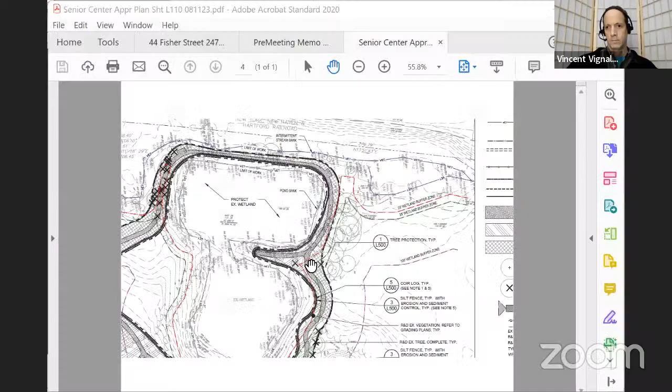That's a plan. So here we are with the approved plan. It showed this distance here to the edge of the wetlands there. So it looked like it came to the end of the pavement—this is the approved paved walkway. And so the new pad is here.

Does that seem right, Scott? Yeah, roughly—within a couple feet here or there, that's where it is. I'm not splitting hairs, but yeah, that's where it is. Okay, good, you can take that down, Vinny, from my perspective. Commission's questions, comments, concerns here.

How thick is that pad? 4 inches, with 6 inches of gravel base underneath. It's a typical bench or picnic table pad.

I guess speaking for myself, I feel like the whole trail is for ADA accessibility. There was a picnic table and a bench out there, and to make things ADA accessible, you need that pad around it, a spot for a wheelchair to get in there.

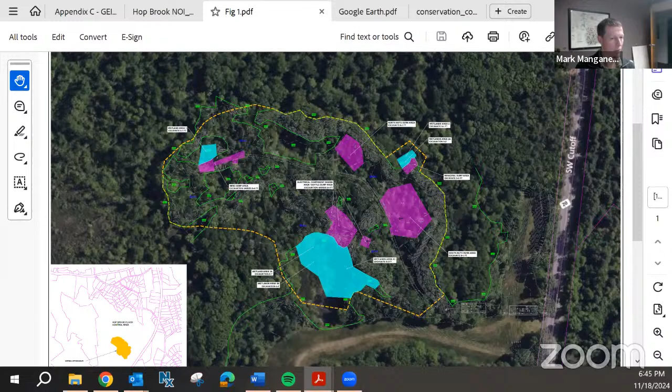If I zoom in a little, we have the wire dump area, which has been called Wetland Area 1. Throughout the plans, the depth of excavation is listed for each area - this is wetland area which will be excavated, and this is buffer zone area that will be excavated.

Sliding down, this is the largest wetland area, referenced as Wetland Area 3. It's mostly 1 foot of soil that will be removed. There are a couple of pockets where slightly more will be removed, closer to 3 feet. They're quite small. Then we have buffer zone areas and upland areas shown in pink.

Similarly, each one is labeled with the depth of excavation. This is another small wetlands excavation area here. I'm going to shift over to the site plans now.

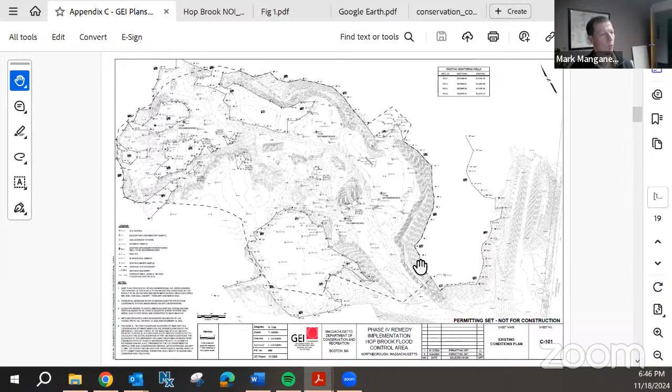Again, this is a very similar view, very similar scale. This is existing conditions - you can see the wetlands around the perimeter. Wetland flagging is here, and small isolated wetlands are here.

This is a site prep and erosion control plan, which really illustrates what's going to happen out there in terms of construction activity. This is a proposed haul road from Southwest Cutoff. There's a contractor laydown area specified here, and the haul road extends in and provides access for construction equipment to each of the remediation areas.

So you can kind of envision how this will occur in terms of the footprint of disturbance and movement of material during the process.

The largest area is this Area 3 that I mentioned - this is 28,000 square feet of wetland, probably the most challenging area in the project footprint. This wetland is probably bone dry right now, but at times during the spring it does have water near the surface or even at the surface. So managing water during the construction process is going to be a key feature of the project.

We have provided a general project spec, which is that we're going to try to do this work during the dry part of the year in the summer. Would have been great if we had started like August 1st of this year - we're hoping for similar conditions to that. But either way, the construction schedule is going to be set up such that the excavation in wetlands is scheduled for the summer months and will essentially adjust as weather conditions allow.

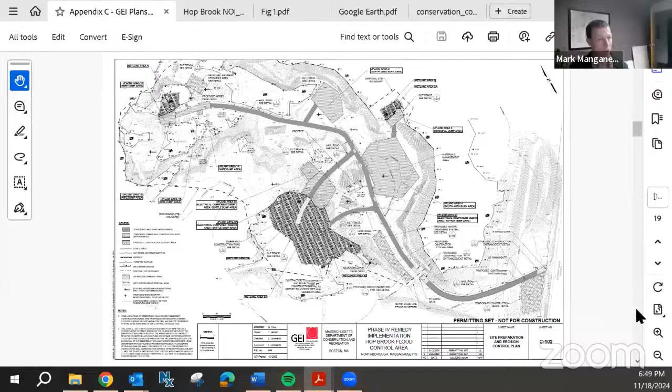And then we have detailed planting plans for each area, which I'll skip down to here. So these are zoomed in. This is that first wetland area we looked at, as well as the buffer zone area. There's a plant list, all native plants of course, and seed mixes are specified. This is the case for each disturbance area, including the upland buffer zone area. So it's not only for the wetland areas, all the upland areas have a detailed planting plan for restoration.

This is the larger wetland area. It's partially a marshy habitat presently, so the plantings are concentrated in the shallower nearshore areas, with seed mix and aquatic vegetation proposed for the deeper areas.

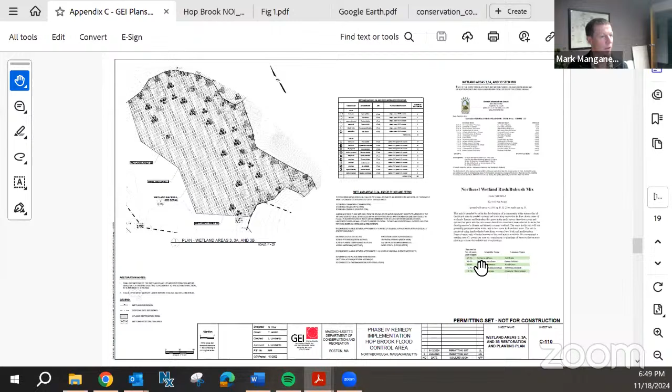And these are some upland areas. There's restoration proposed for all the temporarily disturbed areas, including the haul road, all the laydown areas, the material management area - any area within your jurisdiction that's going to be disturbed is proposed to be restored with native plantings and seed mixes.

Construction will be monitored by a wetland scientist throughout the construction process and then post-construction, to make sure all the plantings reach compliance milestones. 75% coverage within 2 growing seasons is typically the standard. You're probably familiar with wetland scientist monitoring reports being submitted to the commission on an annual or semi-annual basis. We completely anticipate doing that for at least 2 growing seasons, and possibly more as a result of our Corps permitting.

Which leads me to other permitting this project's already gone through. This has gone through the complete MEPA ENF EIR process. We do need to obtain authorization under the Massachusetts General Permit from the Army Corps of Engineers. We're planning to file that application very soon, as well as a water quality certification application from Mass DEP. We are seeking a land disturbance permit here as well - that was part of the application, which Vinny was very helpful in guiding us through. So that was included in this notice of intent.

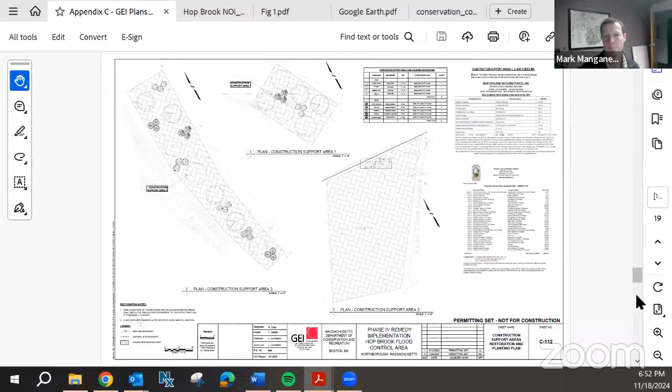And lastly, I'll mention that we did get some comments from Vinny, and we sent him some responses to those this afternoon. Not sure if he's had a chance to review those, but if there's any discussion we need to have regarding our responses to comments, we're certainly willing to have that with you tonight. So that's an overview of the project, and we'll be happy to answer any of your questions.

Thanks, Mark. I've got 3 quick questions here. Are there still debris out there that needs to be pulled out, or has it all been done? There is a little on the surface and things that trees have grown through that are really not retrievable yet.

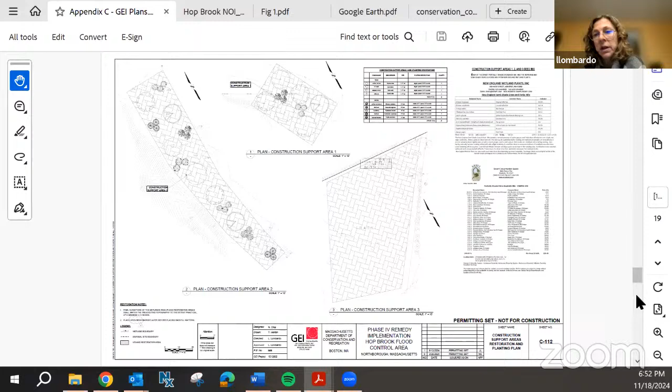From start to finish, what's the length of the project, do you think? Leslie, 2 seasons, or where are we at? Yeah, I think the hope is that we can get it done over 2 seasons, so starting in the summer and finishing late fall.

There's a road going in there, and there's also an area you laid out for construction materials and vehicles. When you're done, what happens to those? Those are all restored also. Okay, good. Any commissioners have questions or comments?

I was just curious, it's hard to tell from this aerial photo - how would you characterize most of these wetlands? Are they forested or shrub swamp? It's variable. The wetland around the perimeter is a forested swamp. This one over here is similar habitat - I think there's a lot of sweet pepper bush over there, so kind of a terrestrial wetland.

This wetland over here actually has water in it seasonally. In fact, this has been identified as a potential vernal pool, so that's a different habitat. But again, we're going to try to restore to existing conditions there so it can hold water as it does presently. And then this larger one is more of a marshy habitat, with shrub swamp around the perimeter as you approach the upland.

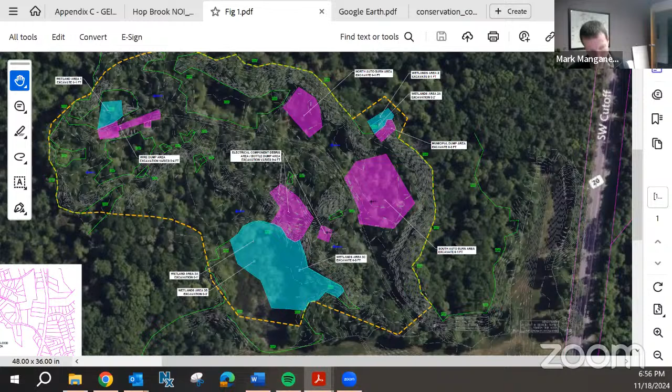We don't really expect any. To be honest, we went through, like I said, the full MEPA review. Now, of course, the Corps wasn't involved in that, but multiple agencies have viewed this. It's kind of been through the ringer. It's not impossible that there would be a change, and if there was a change that warranted coming back to you, we could come back to you with an amendment request. Okay, good.

Rick Leif, you're on. Thanks. So I'm just interested, being an abutter to the property here. I know that none of the residences are extremely close to what's going on here, but we live on Wiles Farm Road, which is a cul-de-sac that comes in from Davis Street, kind of northwest of this area. Our backyard sort of butts right up against the conservation area there. We've been there for 40 years, so I guess I'd have two questions. One, is there anything we should have been concerned about having abutted this site for 40 years, as to what impact it might have had on our well or anything else on our property? Or secondarily, once this work starts, is there anything we have to be watchful for or careful about regarding any disturbances that may have some impact, especially on the well on our property?

For the questions regarding the well and groundwater, I would defer to Leslie. If you could comment on that, please, Leslie. Yeah, I think the contamination on the site is pretty contained to the site. As far as construction activities, it would really be fugitive dust that would be of concern, but that wouldn't really be a concern in this type of area where it's so heavily wooded, and the contractor will be required to keep dust down. Because of the location of the property, it's pretty isolated and very well contained. There are no concerns. Does that answer your question?

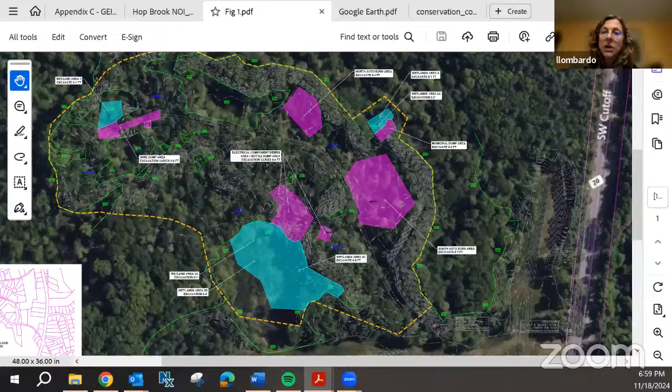I was just going to add that it was primarily auto parts that were buried out here. As Leslie noted, primarily we're dealing with lead, which stays put, and we're going to be monitoring the low levels of groundwater there. That was not a driving factor, I mean it is a controlling factor for the site, but there wasn't any sort of offsite impact to our understanding.

I just asked the commission, as this goes along, if there's any reason why any of us as abutters would have reason to be concerned or need additional information. I assume we'll continue to be kept in the loop about this, but it sounds like it's contained enough and we're far enough away from it, so it shouldn't be a problem for us.

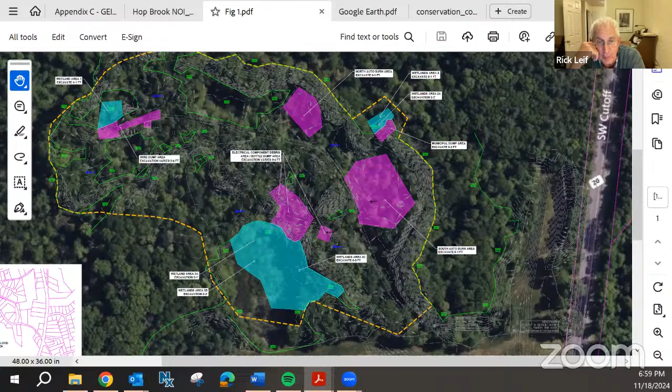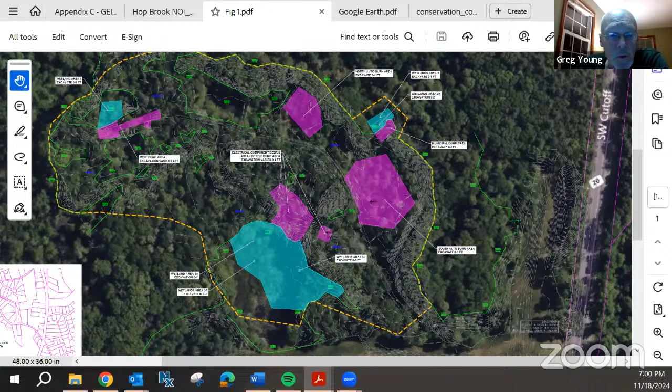Good, okay, thank you. You all set, Rick? Thank you. Mark, if you could take your picture down there, it'd be great. Thank you, sir, got it. Okay, so I think we're all set then. Move ahead here, Vinny, you agree?

I agree. We need a motion to close the hearing on Southwest Cutoff Land Disturbance NOI. So moved. Is there a second? Second, seconded by Dan. Roll call vote: Dan Clark, yes. Justin Dufresne, yes. Todd Helwig, yes. Kelly Marston, yes. And I vote yes. Hearing is now closed.

Now we need a motion to issue a notice of intent and a stormwater management permit for Southwest Cutoff as defined in the agenda. So moved. Is there a second on that? Second, seconded by Kelly. Roll call: Dan Clark, yes. Justin Dufresne, yes. Todd Helwig, yes. Kelly Marston, yes. And I vote yes.

Very good. Thank you, folks, thank you so much. Good presentation, thank you, all the questions were there. Thank you for all your help, Vinny. Appreciate it. You're welcome, thank you very much. Have a good night, take care.

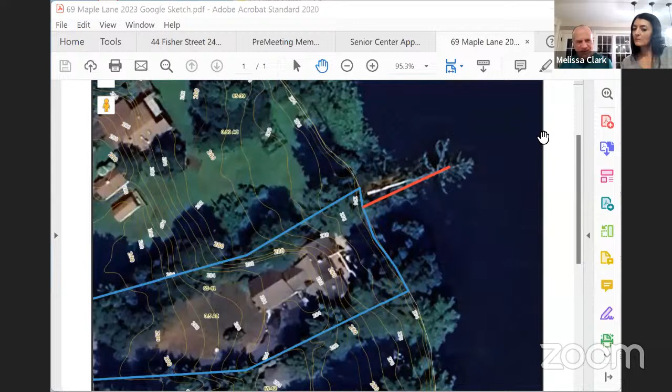Sure. Hey Vinny. Yep, sorry, I dropped off, I had an internet problem. My wife's downstairs, anyway, capacity issue. But did you bring up the point of town property? I have not spoken, I just pulled up the image of the property.

So what you can see in blue is the Clark's property here, and the pond is off to the east. This red line was an estimate of where the tree was, but when I pulled up the 2023 Google image, you can actually see the tree laying down into the pond where it's kind of split along the edge. It's probably about right, a 90 to 100 foot long pine, extending very far out into the pond.

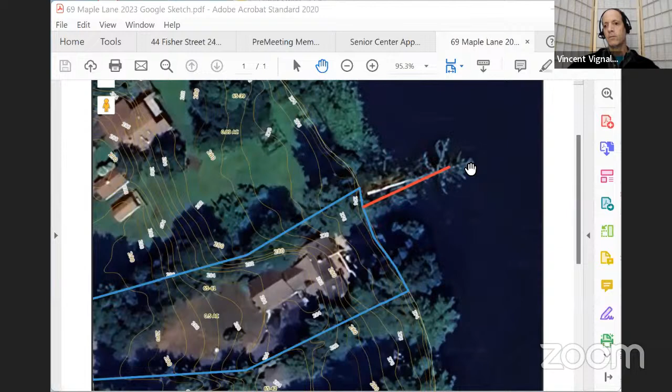This is all owned by the town. The town manages the pond, we've done treatments for the aquatic invasives, but it looks like the tree is owned by the town and on town property. As we've done in the past where people own property and worry about dangerous trees on town property, we allow them to take them off if it is truly a danger. So that's where we stand: whether the commission considers this a danger, or whether it's just part of nature where trees fall and that's what happens.

How would the tree get out of there? You mentioned maybe a crane. Can they access through your property?

So again, we've had several tree companies come out and consult with us, and we asked what would be the most effective way to be least disturbing to the pond, which would be lifting it up directly with a crane. They would put the crane in by your driveway here, and then reach out and get it. Yes, they could do that. There were several companies with options for us to use, but they all ended up reaching the tree directly out of the pond.

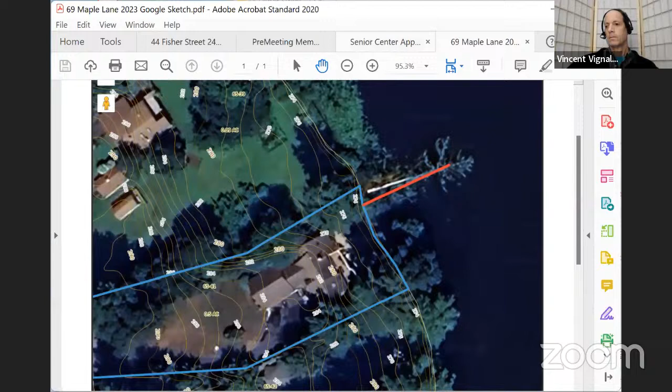So, legal question. Go ahead. If a snowmobiler does run into this, now that we've been made aware of it, are we held liable, being the town? Or is that something snowmobilers should just be aware of, assume there's a hazard?

I don't know what the liability is on this. Or if a kid walks on it and falls and drowns.

Well, it is a pond, so it's not as though it's someone's pool where you can have a fence around it. And there are other spots on the pond where there are trees down. There's kids on kayaks. I mean, I looked at it, and if snowmobiling is a concern, they should be aware of where they're going. It's like driving a car, you make things as best you can see from a distance because it's all pond out there, so it's not like it's hidden around any other trees or something strangely sticking out. If they're familiar with the pond, they'll know about it.

But it is a concern. The idea of skating, it actually looks like a great spot to sit down and put your skates on. Actually, so I disagree. I appreciate what you're saying, Vinny, but I strongly disagree that it's not strangely sticking out.

Again, it is the only thing that is sticking out, and that part of the pond is one of the most highly used parts. You're going to have people who have been snowmobiling for years, come down, come in on the other side of the pond, and zoom down. It doesn't really make sense to me whether the town is responsible or not. If we know it's such a hazard, we're leaving a major risk out there because someone should know better. It would be directly in front of our house, affecting us and our family, and even imagining what that could look like isn't a responsible or optional risk to take.

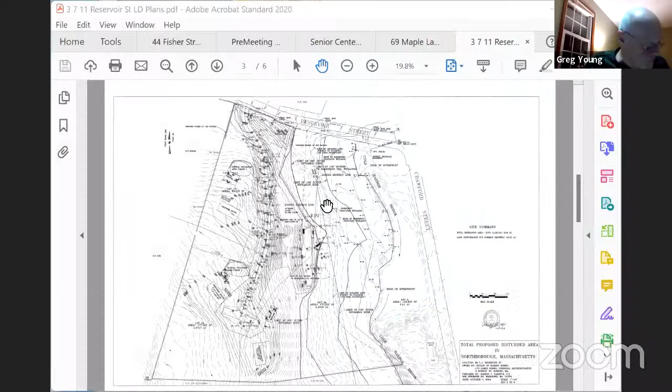Robert, so we have that in front of us as a reference point. Okay, so Crawford Street is to your right. So we come off of Church Street and turn right onto Reservoir Street. We go up about 400 to 500 feet to the entrance of the common driveway, which is just to the east of our neighbor, the Horgans.

Based on the entry grades required by the planning board with their common driveway permit, we come in off of Reservoir Street at 5.9% for about 75 feet, then increase the slope as we come up the driveway to 9% for the next 200 feet. The remainder flattens out to about 7.2% up to the proposed turnaround, which is the turning template I discussed with the fire chief to allow his trucks to turn around.

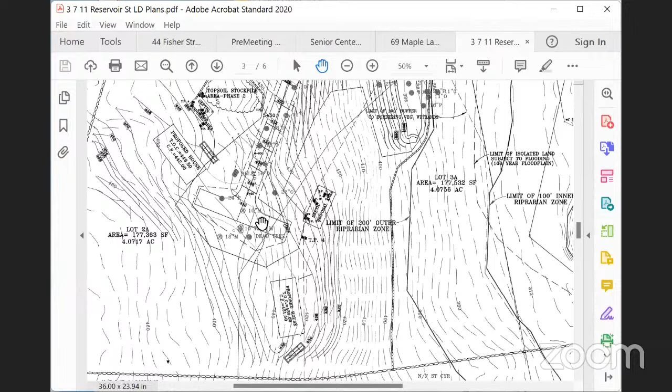So for lot 1, there was a previous ANR approval-not-required plan for this property by land planning, and I had to revise a couple of the lot lines. The lotting plan I submitted is slightly different than the original, because lot one, which I now call lot 1A, didn't have the required lot width, it only had about 160 feet of frontage.

And then when you get all the way up to the back of the property, the south portion, lot 3, the only place they could have put a house, if I kept it out of the 200-foot riverfront zone, was on the side of a slope that's about a 20% grade. You just could not build a house or a septic system there.

This land is in an estate owned by the estate of Robert Romeo. So James Romeo is the executor of the estate, and it's him and his brother trying to develop this property, basically trying to get it approved so they can settle the estate. That's how I got involved, to see how they could get 3 lots out of the property.

The nice thing for the project is that almost all of the site flows towards Cold Harbor Brook. You can see from the contour lines that the water is flowing perpendicular to them, and I think there's only a small drainage area up front, a little triangle at the northwest corner near the entrance, which actually flows to Reservoir Street right now. The remainder of the site flows overland and eventually to the wetlands and 200-foot riverfront area, pretty much self-contained on the property.

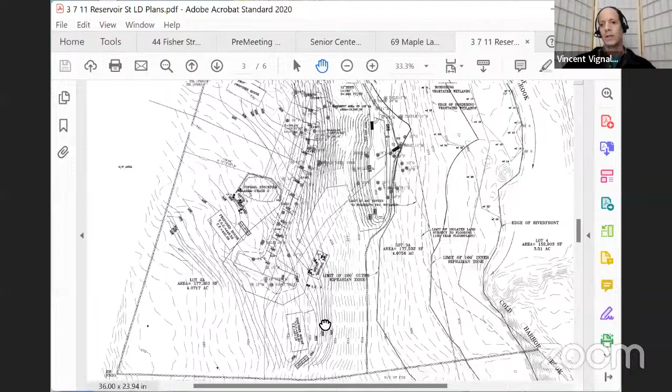And the reason he's here is because of the land disturbance permit. So he's altering more than an acre for all this work, so he has to file with the commission. But generally, he's trying to keep everything out of the jurisdiction and staying 200 feet away from the brook, which is very good. So the questions that I have, there are a bunch of details of drainage and stuff like that, but this is just our initial presentation. So I don't know, Bob, we don't probably need to go into all the details of all my questions. I think you and I can work those out, but just to get the idea for the commission and get feedback from them as well as from abutters would be helpful.

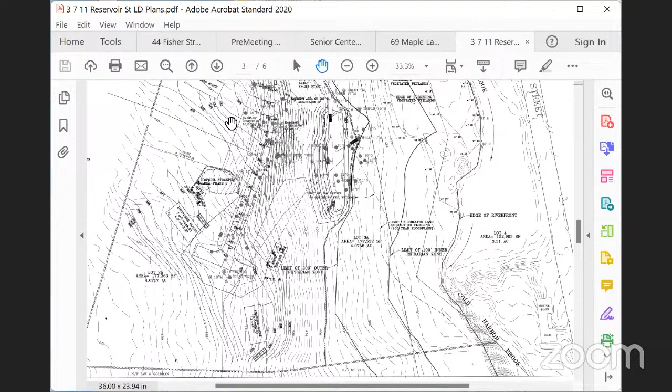Just as a side note, we did do all the soil testing, so we have adequate deep holes and perc tests for 3 septic systems. They have not been designed yet, but they could be at any point. And my vision is that a developer might want to build this together, so he would design the septic systems if that's agreeable to the commission. I'm just not sure how much detail on the lots we need. I guess that's a quick question for the commission.

I can jump in on that one. Right now, that's something, you know where you want to put the systems, you know that the soil testing works and the system's about the right size. So that's all we really need for this land disturbance permit. So you don't need detailed septic designs. Okay, but we do need the site stormwater stuff as the construction begins and the phasing, and that's the stuff that I was looking for. Oh, it always comes down to stormwater management, correct.

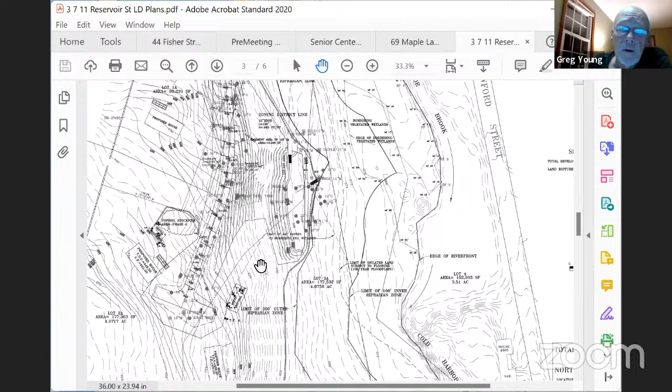So Vinny, you have got some open items that need to be addressed? Yes, we do, so we'll continue this till December then. Yes, we will. I think he was looking to get comments from the commission if there are any specific comments, or if the neighbors, the abutters, have any comments or questions.

Let's start with the commission. Any commissioners have comments, questions, concerns? I have a question. We're just talking about 3, 7, and 11 Reservoir, correct? Not 363 Crawford? Correct. Okay.

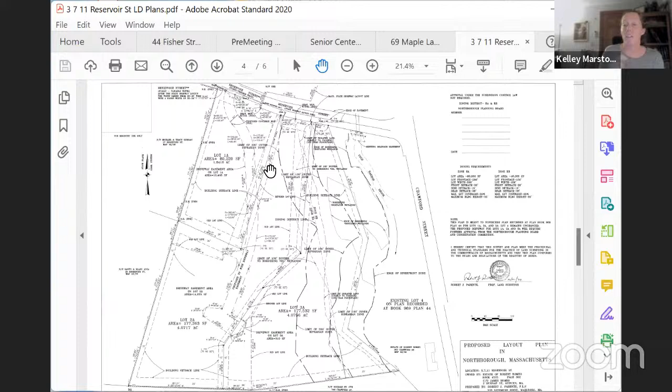Super, I know what we're talking about now. Right, you good, Kelly? Yep. Anybody else? Questions, comments, concerns?

Just a couple on my end, Greg. I guess for a land disturbance permit, I feel like we would want some real house footprints that we're working with, some real driveways. I think if we were to approve this, it would be contingent upon somebody coming back with real house lot plans, so we'd know the size of the house, how much impervious area it had, what the layout was.

And just the basin in general. I feel like a development like this along that drive, we could probably do something with some smaller pockets of stormwater as that driveway kind of works its way up. Something out in the middle of the woods with an 8-foot high retaining wall along the edge of a basin would require a fence on top for building code, and I just don't know access to that basin for maintenance. Who owns it? Is it all 3 lots that have an access easement over it that can provide the access every year to maintain it? I feel like there's a lot of open questions that I would want the actual developer to answer.

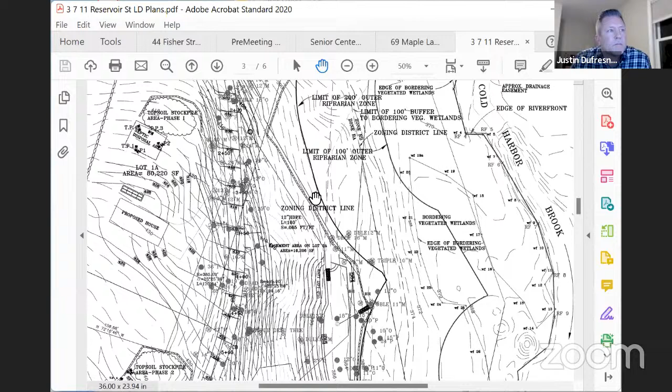There's so much information on my lotting plan that I will need some drainage easements when I finalize with the planning board, but that could be done hopefully without coming back. Those are just easement lines. So yes, the maintenance would be in the common driveway agreement, which comes with the planning board determination. The yearly maintenance, I think it's in the stormwater management report. I think LBAG put a proposed maintenance agreement there, the whole O&M agreement, it's with the attorneys.

Okay, and maybe once we get to that point, I know there's still some open items with Vinny. I think we could eventually make it contingent upon somebody coming back if the house footprints change or driveway access, things like that. I know it's a land disturbance permit, so I don't know what we require, but I guess any changes to the plans would require somebody to come back to us. So those people would have to revise the stormwater accordingly based on any driveway changes or house footprints or anything like that too.

I'm going to try to meet with Vin next week if he's around to go through his comments, but I think I could also ask LBAG what percentage increase in impervious area would be allowed without going back to the commission. That might be something helpful to the commission members.

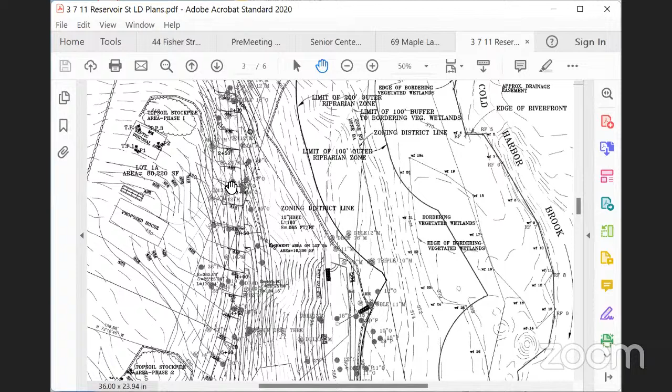You all set, Justin? Anybody else? I've got a hand up here - Lisa Orr and Michael Horgan.

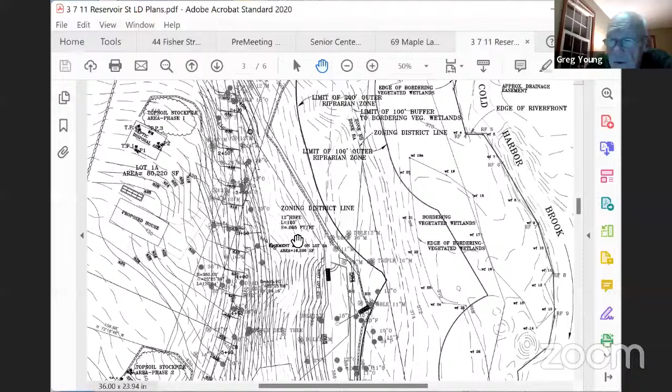Hey Kaylee, I can't have Lisa or Michael give them permission. Can you take care of that for me? Yeah, let me try. But I went out and came back a couple of times, I think one of those times I lost my approvals here.

So the Horgans are just to the west of us. They have a house just to the west of this property. And Lisa Orr is across the street. Mr. Chair, I have Lisa, but I don't see, was it Michael? Michael Horgan, yes, Horgan, okay. All right, they both should be coming in for you.

Myself, but folks, you with us? I'm still looking at the... Hello? Hi, I'm Lisa. Yes ma'am, I don't know if you can see me, but I can't see you. Vinny, can you take this? Oh, I've got you now. I've got you, okay. And Michael's with us too. Okay, super, yeah, all right.

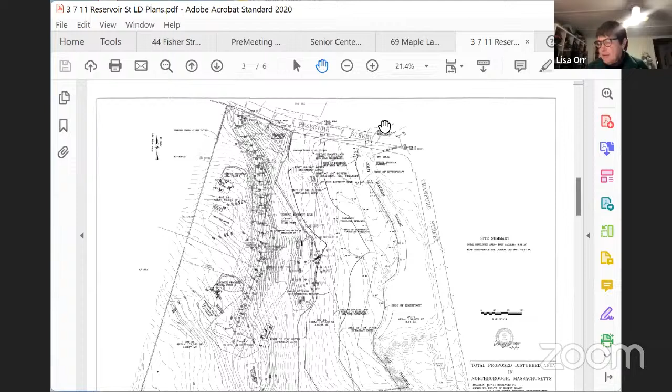If it's okay, I live across the street from this property. And so I just have some questions about it - it seems like the proposal for the road has changed a little bit over the months.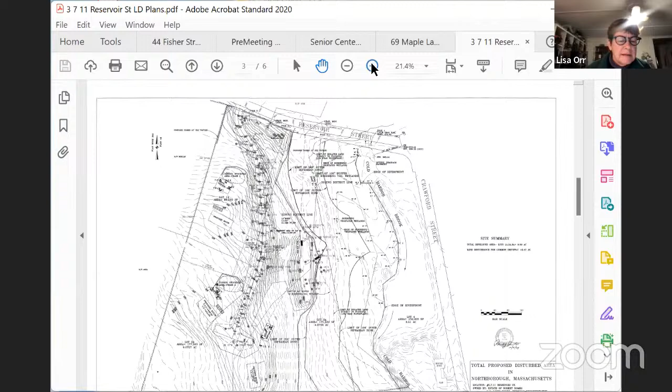And so I would like to know the width of the pavement of the road. I have been looking at this same document, and just as a non-engineer, it looks like there's some pipes under the road and maybe a catch basin and stuff. Where are those things on the elevation map, and how does that work?

So Lisa, in order to control the water coming off the common driveway, we proposed 20 feet of pavement for the common driveway and a 30-foot wide easement. In order to control the water, you're correct, we need to put in catch basins and drainage structures, and we also need to pre-treat it before we send it to the detention pond. So there is a closed drainage system, which means it's piped, and that's basically to meet all the town regulations and state stormwater regulations.

So it runs off the road into something like a French drain pipe, and then it runs into a catch basin. There's a couple catch basins down in the road, the square grates down at the corner of Crawford Street and Reservoir Street, so they catch the existing road drainage.

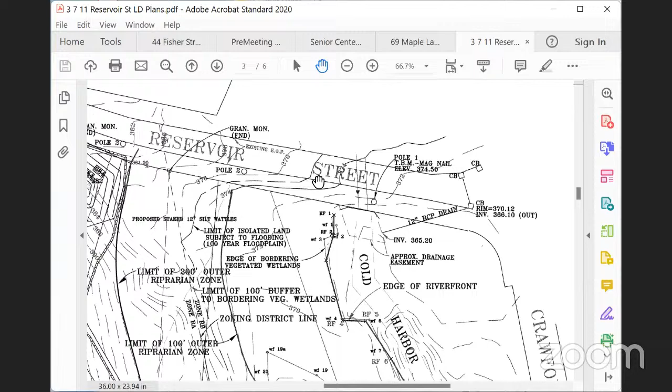Our site drainage really is almost all self-contained. There's one down at the corner there, Ben. We are going to need to contain all our water if we're going to get the town to approve this 3-lot common driveway project. That's where we build a small pond, which catches the last catch basin, and then we're proposing a larger pond, which infiltrates some of the stormwater back into the ground, another requirement of the state stormwater regs.

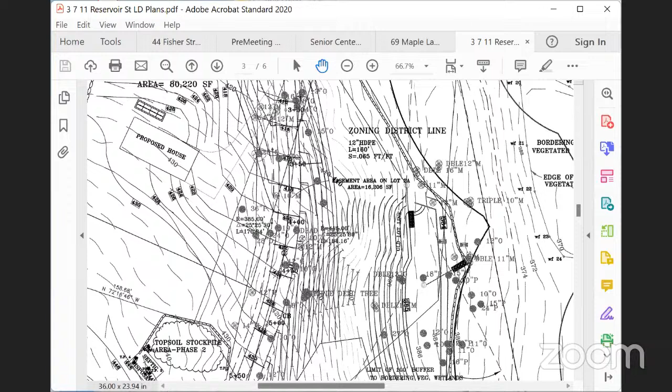I think it's the first inch of the runoff that might be the town regulation, and I think the state is a half inch. So there's all sorts of standards that we're trying to meet, and that's why the commission and Vin sit down and review this plan in detail.

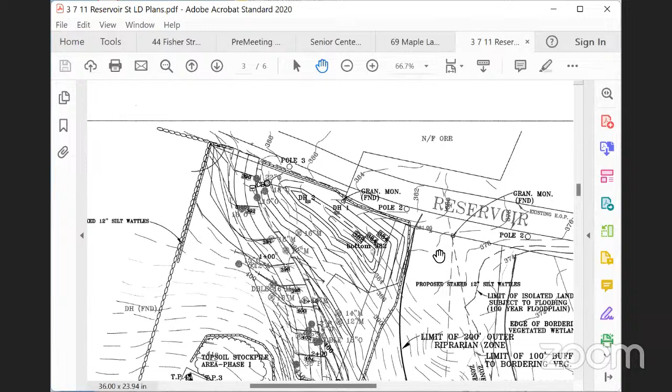Are these circles possibly trees? Yes, those are tree symbols.

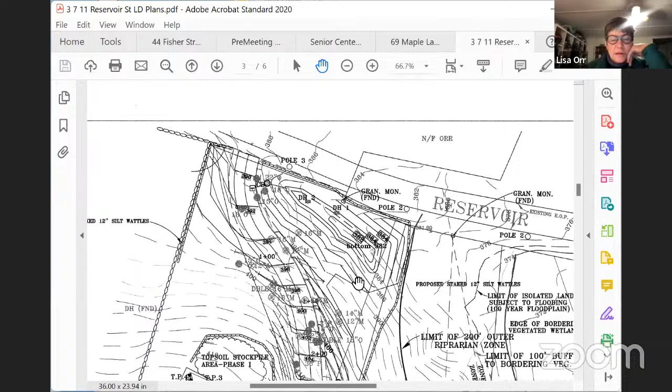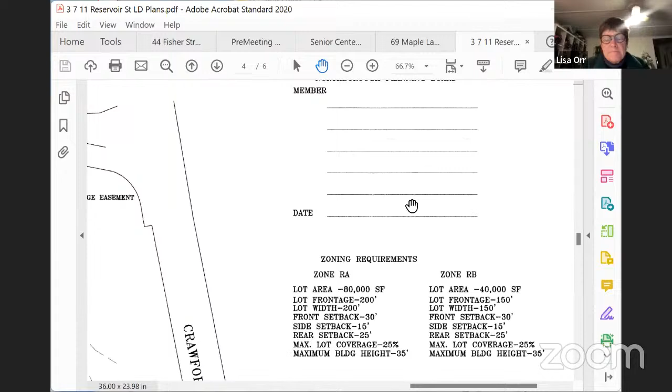Because trees typically absorb water, if they're going to be removed, are any of them going to be replaced nearby, maybe not where the road is? Not at this point, it's not normally a requirement.

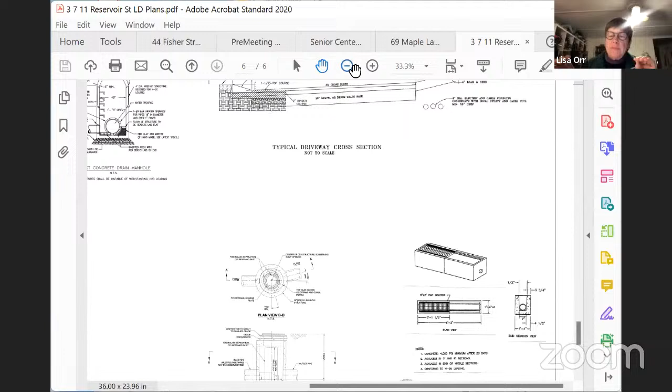And it's the 20-foot wide paved part of the road. Is that typical? It seems a little wide. My sister lives on one of those 3-lot long common roads, and it seems like it's skinnier than that.

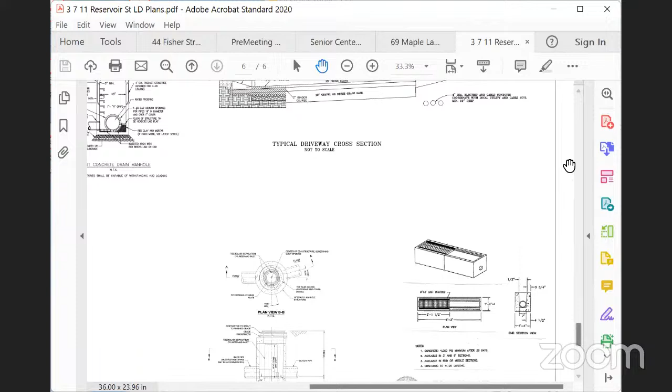Actually, 22 feet is what the town planning board might like to see. I'm actually asking for a waiver to 20 feet. 20 feet is kind of the narrowest I can go and make the fire chief happy. Okay, it's a fire thing.

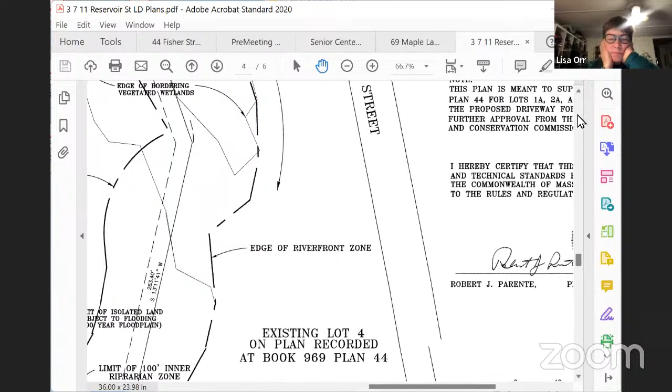And then it says easements on the side. What happens in the easements? What does that look like? Does it just have shrubbery, or rock, or something like that? The easement is a dedicated area to do the construction and build the common driveway.

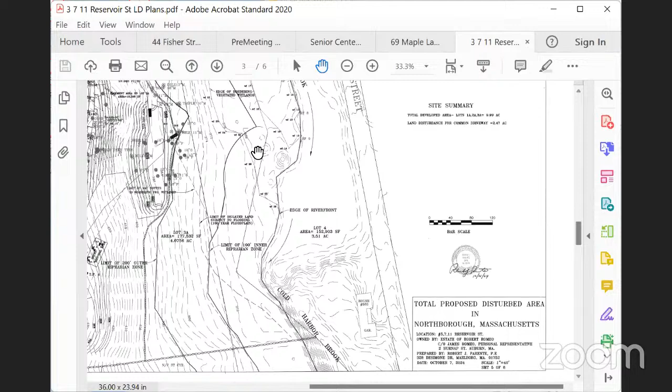So is that part going to be paved also? No, that would be loamed and seeded. When we get done, that'll be loamed and seeded. That'll be grass at the end of the project, correct? All right.

I guess these are my questions for now. Do you know how many trees would be removed to make this driveway? I didn't count them, but I could do a rough count. I don't have that number in front of me.

But I would say, so there's some small ones because the planning board had asked us to locate anything over 10-inch caliper. So there are some smaller ones, but there are a few bigger trees in there. Yeah, it's pretty foresty looking up in there, so I'm just concerned that when that road goes in, it'll take away, I don't know.

It'll be less of a rural character that Northborough had kind of wanted to preserve on Reservoir, since we have a lot of the old houses over here. Well, they're old everywhere, but yeah.

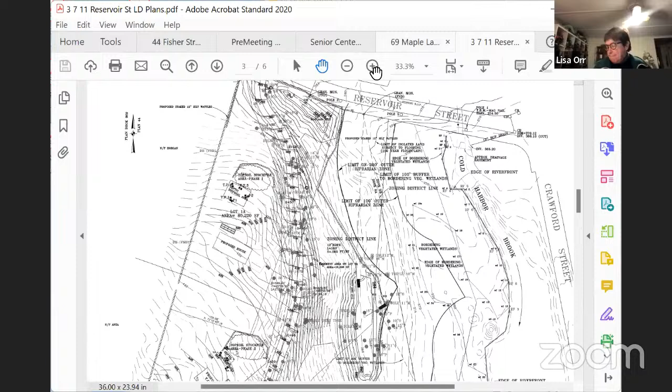Hi, good evening, thank you. Yeah, I have a few questions or comments at this point.

I think as Lisa has stated, the project here is on what we call Bartlett Hill. Our property is directly adjacent to the proposed subdivision or home development, and our property gets extremely wet during the spring months when the snow is melting or during heavy rain. Our yard, the large grassy area between our house and this proposed development, sits lower and gets very wet. You can't even walk on the grass surface without sinking in mud up to your mid calf in the springtime. So I'm concerned.

I know that the engineer had stated that all of the contours show one way and direct the water in a certain direction. But if you come out to our house and just stand in the grassy portion of our yard and look up to where the homes are, lot one is much higher than our yard, and I'm really concerned about any proposed disturbance or runoff coming from both the structure and any lawn area.

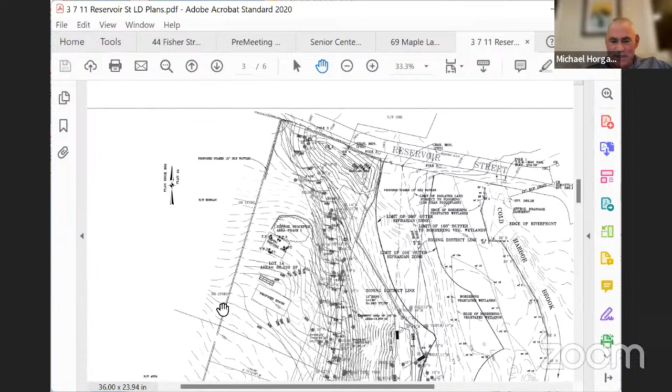I think one of the commissioners had also had questions about the proposed house, and I'm not quite sure approving a proposal like this is approving a certain size home. You could sell this lot and end up with a 3 or 4,000 square foot home. So I don't know what kind of limits are placed on the impervious area and the runoff from the roof line of whatever house goes in.

I think the proposal said it was 2,200 square feet. I don't know how much of that was impervious roof area and where that roof drainage would be directed. I'm concerned about that coming down toward our property at 17 Reservoir Street. But I'm questioning what is the proposed limit on the size of home that could be built, and what is the proposed limit on how much of that area around the house can be torn up and regraded into something less permeable than a forest floor. So that's one of my concerns, really directly around the drainage and wetness and water coming off the base of Bartlett Hill.

I know in looking at the plans, I don't know if you want me to just move on to some of my other thoughts or address things one at a time. I don't know what is best for the board. Well, if you could give us the highlights, because we're going to continue the meeting next month anyway. So if you can just get your thoughts out quickly, we can take them on then and make sure they're addressed.

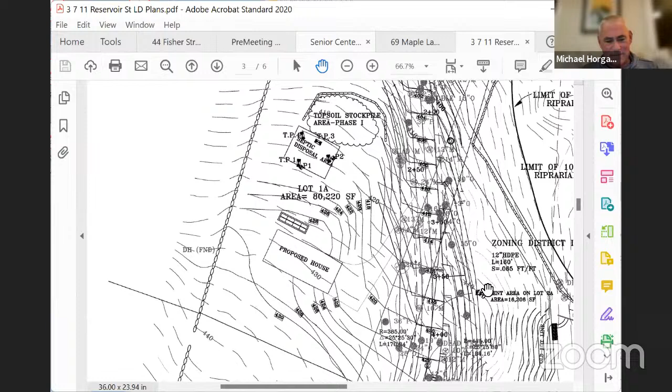That's a good concern. We actually, as part of this project, there's going to be a homeowners association among those 3 lots. And that homeowners association, which is funded and taken care of by the 3 lot owners, they will be doing the operation and maintenance in perpetuity. Okay, thank you, I think that's what I have right now at this point. Thanks for your time. Okay, very good, thank you, sir.

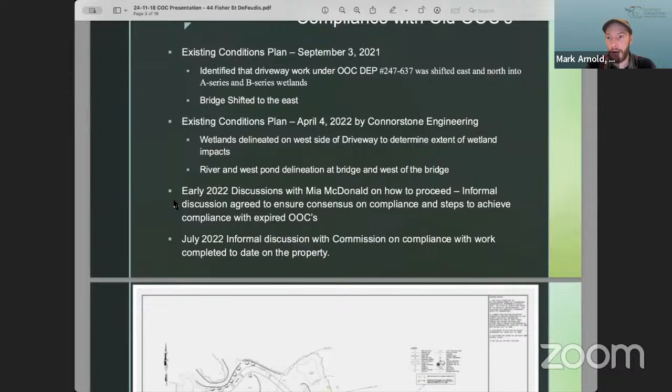So we had an informal discussion with the commission in July of 2022. This plan here, my apologies, it's very grainy—I guess it's because of the way I imported it—but you can still see the driveway snaking through. You can see the green outline, that's the original wetlands.

These yellow lines are where the wetlands changed. Wetland A, on this side here, got pushed back because of the fill that was placed there. Wetland B and C got pushed back on the south side and then naturally expanded on the north side, in this area here.

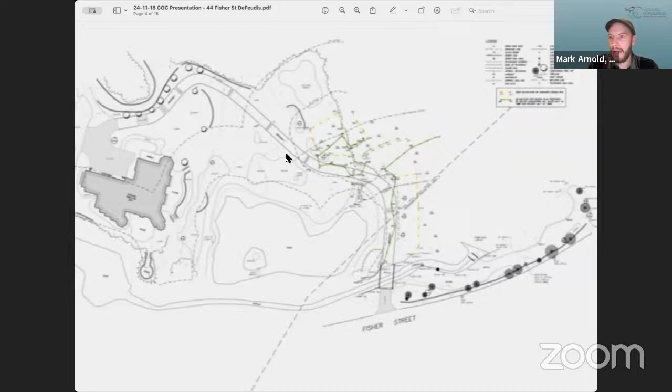This is again where the tennis court was, Greg, right in here—right in this area right here. So there was a tennis court with landscaping around the whole thing. This whole area was really made different in the 60s and 70s when they built the ponds and everything that was there. Besides the house, it was kind of like a sports area almost, I guess.

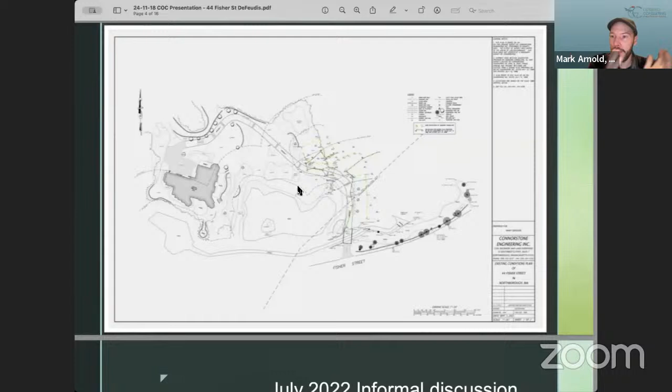So this plan was presented to the board, saying: here's what we know is on the property, here's where we know the wetlands are, here's where we know the impacts are, and how do we proceed?

The reason we had that informal discussion was to make sure we knew how to mitigate and address the compliance issues, because we needed a permit that would address what needed to be complied with so we could do those activities and bring the site into compliance, so that the old orders could be closed out formally since they're expired. We can't do work underneath them.

From that discussion, we concluded that we needed to file a new notice of intent to mitigate the wetland impacts and restore wetland A per the original order of conditions. We also discussed the footbridge over the river further downstream. The original plans had implied it was going to be removed, so we discussed having that removed since it made sense as wetland A was going to be restored—didn't make sense to have a footbridge there.

We also discussed adding a fence along wetland A to provide permanent protection to that wetland meadow, because originally they were just saying to restore the wetland and build a driveway, with no protection of that wetland. So there was discussion with the commission about putting up a fence there.

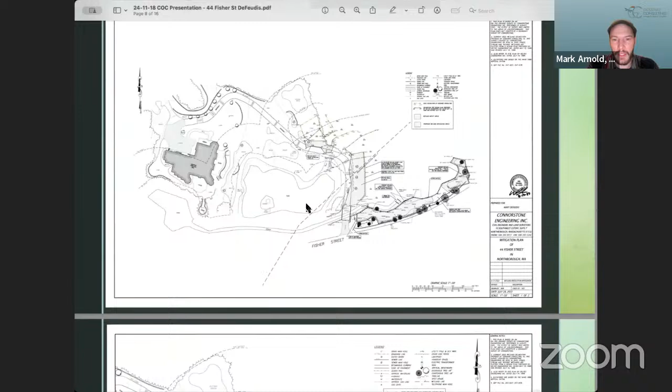So this plan here was presented to the commission for that notice of intent. It showed again the wetland delineation completed by us, where the wetlands are filled—call it the wetland impacts. We proposed to do wetland restoration along this area of the river and the bank of the pond. This area was heavily landscaped, lawn right up to the bank of the river and pond.

We figured this was the best place to do wetland restoration replication—taking this whole strip of area between Fisher Street and the pond and river and restoring it as a natural strip. Now there's complete naturalization from the street all the way to the pond and river, cutting off this whole area of landscaping that was right along the bank and river. That's what the notice of intent was proposing.

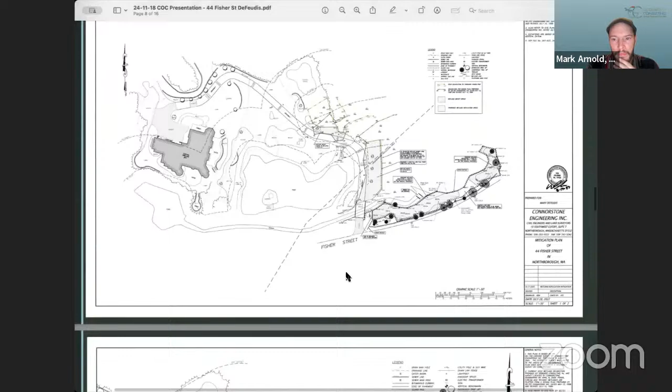This plan showed the whole property, the house, the grading around it, everything. Then we had a detail sheet zooming in further, showing the replication area, removing the bridge, and we also showed the fence.

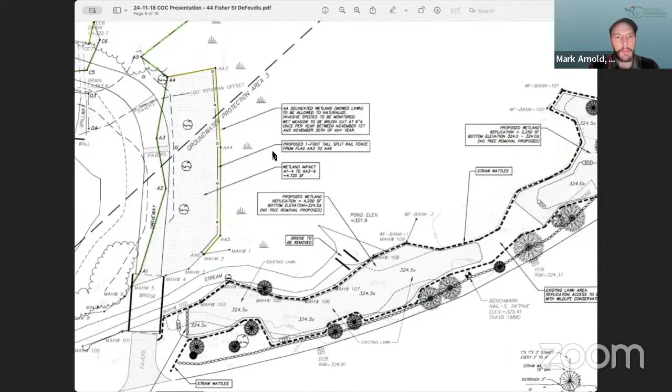This fence was moved to the west of its location on this plan, per discussion with the commission during the notice of intent. We flagged it out with Vincent in the field, and then put it in—you'll see that on the as-built plan shortly. And so that was issued.

As soon as it was issued in September 2022, we hired a specialist wetland restoration contractor called SumCo. They do special restoration, a lot of cranberry bog restorations and similar work—a very specialized company to construct the replication area. We coordinated with the agent in the field about the fence location to make sure it was right where it was wanted before installation.

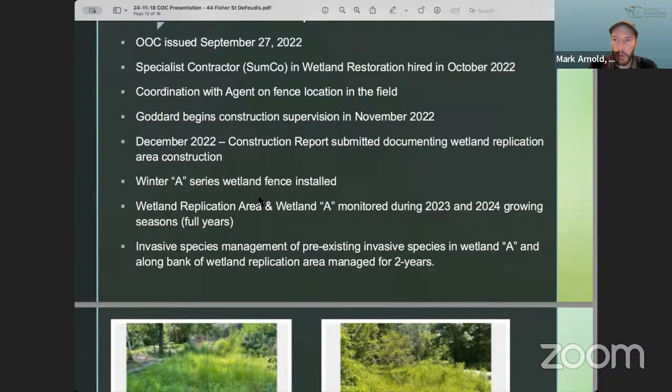We began construction in November 2022, and did a construction report in December 2022. We figured out what was wrong, quickly acted upon it, and executed everything.

We've been monitoring this replication area for two years, including the Wetland A series. We've also been doing invasive species management as required to make sure the meadow was healthy, and also that the banks of the river and pond were healthy, in terms of removing the invasives that were already there before we started the replication work.

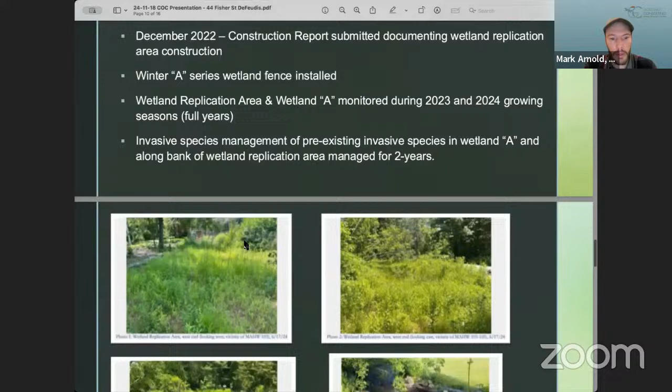Here's some photographs—I apologize, they're grainy. These are from the actual report, so I guess I should have inserted them separately, but I just took screenshots from the report. This bottom right photo is where the bridge was, so you can kind of see the bank there. All the erosion controls have been removed now; this photo still has the control in it because it was taken this summer.

And the fence is doing a great job at being that demarcation zone. So in summary, why are we here? We're here for certificates of compliance for 3 orders of conditions.

Principally, the starting order of conditions we want requested to be issued would be for DEP 1222, because that order allows us to show how compliance with the previous orders was issued and clarified. That was for wetland replication and the restoration of wetland A. Then as previously discussed, with 637, the driveway, the issue was wetland impacts and the restoration of wetland A. And then 678 was basically the house, which was basically built. They did minor shifting of the driveway on the far side of the house away from the pond, and then they didn't build the extra driveway entrance.

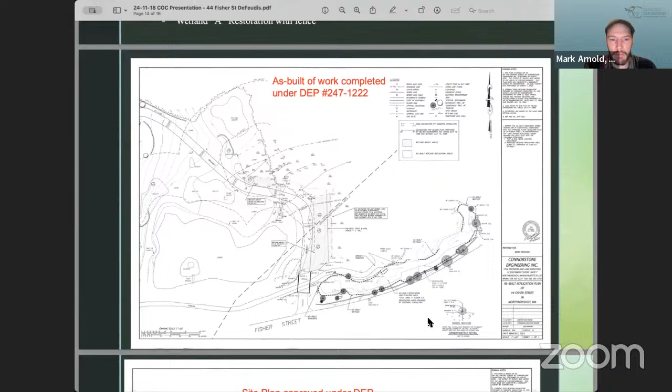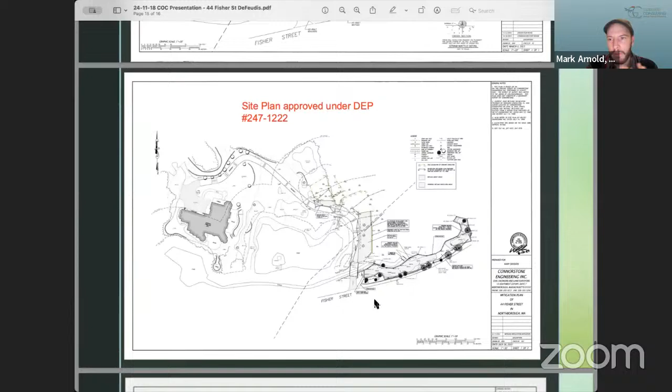The site plan that is on record with the commission with 1222 shows the whole property, the existing driveway, the house, and all the pond features and stuff like that. And then as part of that initial filing as well, we also had the existing conditions plan that was submitted to the commission that showed what was there before we built the replication area.

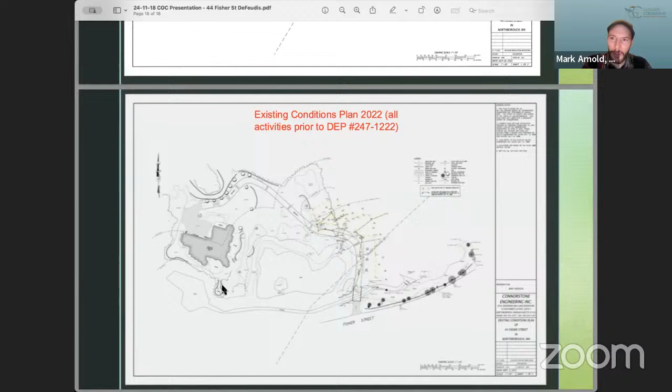So our hope is that we could get a COC on all 3 of these orders of conditions, so that way this project can be closed out. And so Mary can continue to live in Northborough, but no longer here, and doesn't have to think about her expired orders of conditions that were issued to her former husband.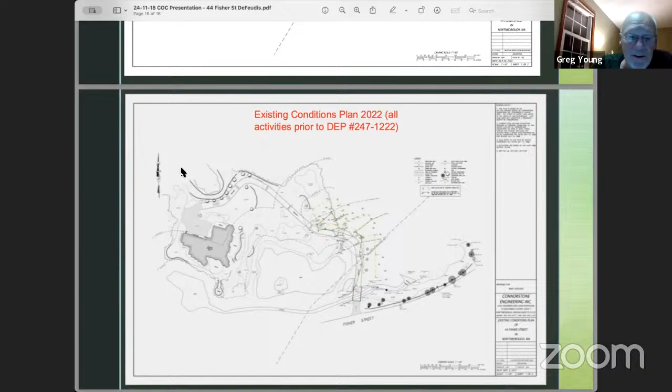Okay, very good. Thank you, Mark. Vinny, you all set? Any issues you have?

Yeah, we've got most everything. Just looking at the 3 different orders, the orders actually say that we need an as-built plan for 637, and I don't have an as-built. I have what was called a proposed mitigation plan that had existing conditions. So I was looking for an as-built plan that at least referenced that this is what was built, and some certification that it was in compliance with 637. Basically the same thing for 678, there was no as-built plan for that one either.

But I do have an as-built plan for 1222. And when I was looking at that, I did notice that there's a wetland that's being mowed in the area by what was referred to as the tennis court. There's no permits anywhere, there's no discussion of allowing mowing of a wetland. So my question on that, before we say everything is fine, was: does the commission want to allow continued mowing of the wetlands in wetland area BB?

So to the chair, if there's a certain plan with language that the commission wants together, just to close things out, we understand that may be something the commission wants to see, just to help close things out clerically. We think we have all the data in the file in the record. It just may not have a plan that says this plan is for all these orders of conditions.

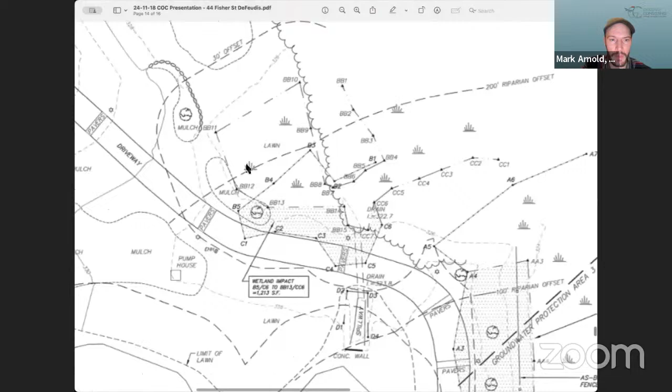In terms of the question of the mowing, this is wetland B and C. So I'm going to walk the commission through. This is the as-built replication area, and we're going to zoom into this area here. This is the area where there was a tennis court. In this area there was landscaping, and this tree line over here is a historic tree line with large mature trees.

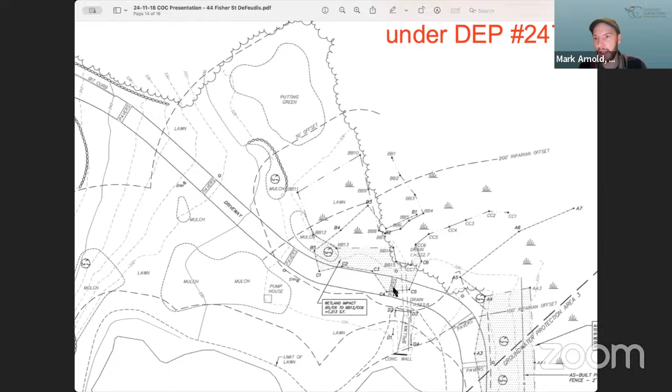There was nothing to the left and west of this area, and there was already a crossing where this driveway crosses, although not as far to the north. So from our understanding, this area was basically landscaped, worked area, just like the bank of the pond in the center here, which has the gazebo and everything else.

The fact that there was no mention of restoration or protection of the B and C series wetland in the order of conditions that reference restoring wetland A, we inferred that there was probably consensus that this area is maintained. We'll leave that, and we'll restore wetland A, which is on the right side of the driveway, and draw our lines there. That's kind of difficult to go back on, but that's what we put together.

This area has shown the wetland got bigger into the lawn, and it's been shown as lawn since we did the informal discussion, filed a notice of intent, and it's on the as-built as consistent with that condition. So that's our understanding - it's not ideal, but it's something that's been historically maintained that way. It's possible that the historic alteration of the whole property created that wetland as well. That's the nature of that area from our understanding.

If I could just really quickly, through the chair, I would also note that any current activity pertains to the current property owner. As Mark Arnold mentioned, Mr. DeFeudis does not live at the property any longer. So we'd hope that any questions pertaining to current conduct pertain only to the pending order of conditions before the commission.

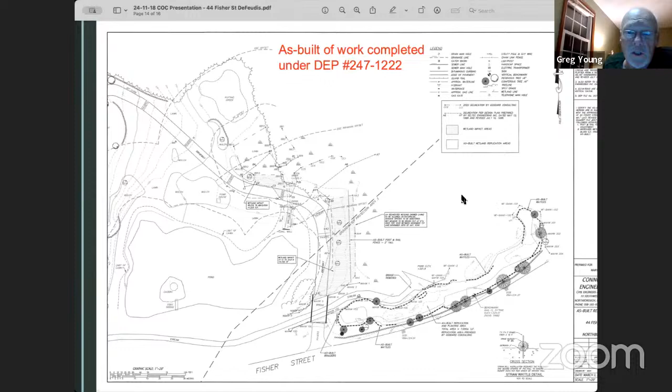So, couple questions. Who owns the property today? So the owner is Daksa Patel. She is the wife of Manish Patel. All right, so why - Patel got issued an order of conditions in 2021. Why did DeFeudis get issued one in 2022?

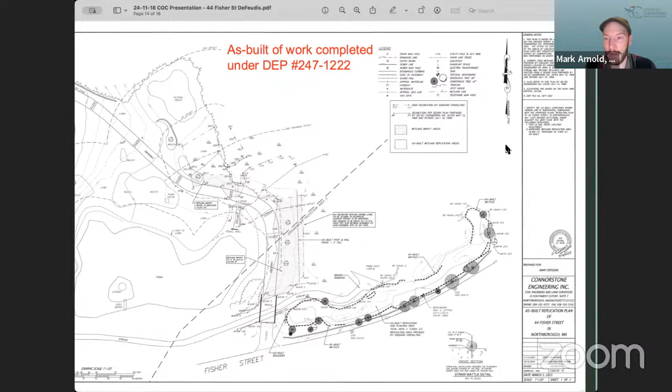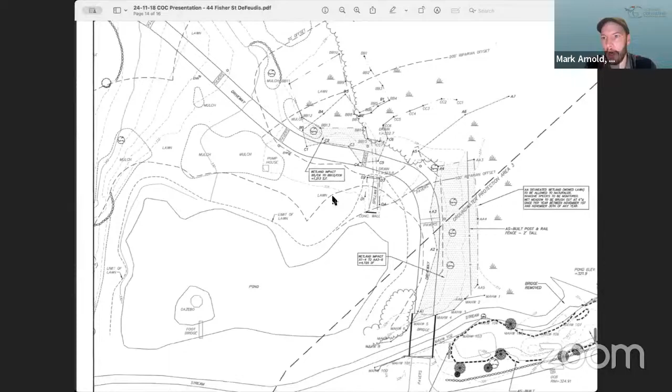So Manish Patel had a violation of the Wetlands Protection Act and Northborough bylaw by cutting trees and vegetation around the central pond - this is the pond around where the gazebo is - and along the driveway crossing that leads from the central pond. Part of that violation required the filing of a notice of intent. That notice of intent was filed faster than Mary DeFeudis's notice of intent, because his was easier to file, more straightforward. Mary's required the delineation, the plan coordination, the replication documents - all that took a lot longer.

So there was a weird overlap where we knew about Mary's challenges to her old orders and conditions. Manish had a violation, so we got that addressed with the notice of intent, and then we filed Mary's after that. So in terms of history, that's what happened.

And discussing Manish's order of conditions, I would hope it could be tabled till after we discuss the orders that pertain to DeFeudis. Yeah, I'm not in favor of that. I mean, I'm willing to consider issuing certificates of compliance for DeFeudis after I hear everything all together. I'm not going to piecemeal it now.

So through the chair, it's my understanding that the order of conditions pertaining to Mr. Patel do not pertain to the same work that was authorized under the order of conditions. Is that correct, Mark? And that is correct. There's no overlap in terms of areas of activity or work under Mary's wetland replication work, which is the wetland A and the replication area, and Manish's stuff. It was completely two separate areas. They never crossed work areas.

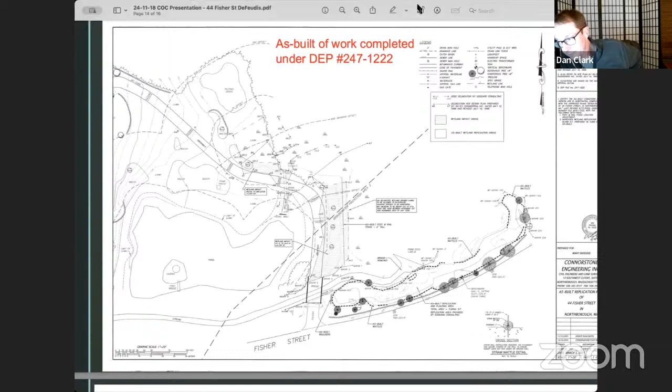Dan, Justin, Kelly? I would like to hear the whole story. Yeah, it's all the same property, so let's hear the big picture. All right, that sounds great. So I'm going to change screens here. Sorry, all right, here we go.

So this is again Mark Arnold with Goddard Consulting here on behalf of Manish Patel, and this is for a certificate of compliance for DEP number 247-1207. This order of conditions was issued as part of requirements of an enforcement order issued to Manish Patel for illegal cutting of vegetation, including trees and shrubs around the central pond at 44 Fisher Street.

This notice of intent was filed in 2021, and this restoration plan in front of you was the restoration plan submitted to the commission as part of that order of conditions. There was not a stamped engineering plan submitted. It was basically just an overlay of the existing conditions plan the commission already had on record for DeFeudis. Then we overlaid from that plan, which was on record, the proposed layout of plantings.

The work that occurred did not result in disturbance of the earth itself. They were stumps and shrubs cut flush with the ground and left in place, so disturbance didn't really occur. It was just vegetational pruning and heavy cutting. There were some trees and some shrubs still left around the pond in certain areas. In addition, there were large areas of the pond that didn't have any cutting because there is either grass that goes right to the edge of the pond, or other landscaping like lilies and other herbaceous plants that flank the pond.

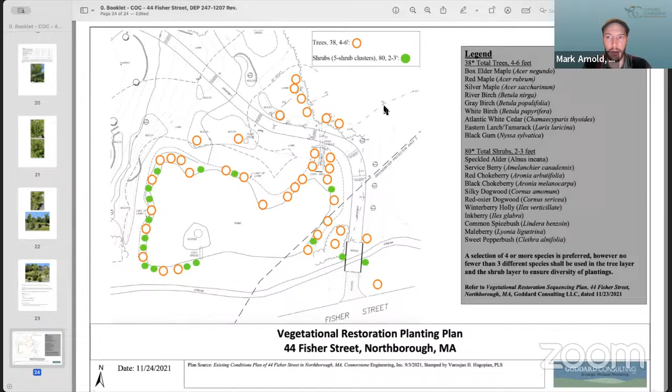We strategically laid out trees and shrubs based on where stumps were and where everything was cut down. That area has been - again, order was issued in 2021 - and this is our final report from this summer. We have 76% survival of the tree plantings and 85% survival in the shrubs, so we had some mortality.

Example photos. Here's an example of a very tall red maple, some chokeberries, winterberry, tupelo, and an example of the trees and shrubs along the edge of the pond. And then another one here.

As a reminder, this area was landscaped - there was mulching and river rock stone around this whole pond before Manish even touched anything. So we are basically restoring back the natural vegetation, actually putting back more natives because there were a lot of ornamentals that were around this pond that were cut down.

We put back 100% natives around the pond to grow back. On top of that, the commission got an order of conditions with perpetual conditions documenting this issue, documenting the need to prevent use of fertilizers and other things there.

And just to be clear, there was mulching and stoning around the bank of this pond. So the landscaping around the pond has been maintained basically consistently with that.

The current landscaper managing this property didn't do the violation. What happened was Manish hired a separate landscaper, and then he went back to the original landscaper who managed it for DeFutis. So he's actually managing the property again, which has been great because he understands the property and understands how to ensure things aren't changed and altered in a way that wasn't how they've been maintained for a long time, since basically the 90s.

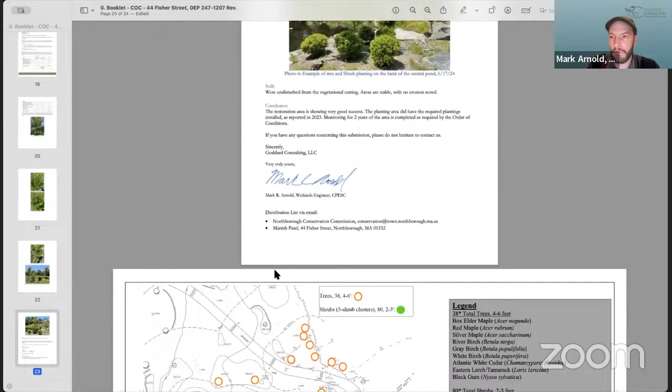So that's the history, Mr. Chairman, of that order. And hopefully that is good information and context for the commission as they review the 4 orders of conditions on 44 Fisher Street.

Very good, thank you. Vinny, on that last order of conditions, what are your thoughts? You're muted.

Yes, that's the one regarding the orders of conditions that I reviewed. It talked about the mulch to be used being chemical dye-free organic mulch. And as he said, it's got chemicals and dyes, but he says they're food grade. I just asked today about the MSDS sheet on it, and it indicated eye irritants for users to be careful of, but it doesn't have any assessment of environmental impacts.

So it's kind of up to the commission. It was your condition to say no chemicals, and I didn't want to waive a condition that you guys put in, so I leave that up to you. Is that the only issue you have with that one?

That, and I think I have the as-built, don't I, Mark, on that one? There's actually no as-built required for this order. Oh right, that's what it was. This order didn't have an actual engineer plan submitted as part of it, nor was one required, because it's just restoration of plantings versus what's actually there.

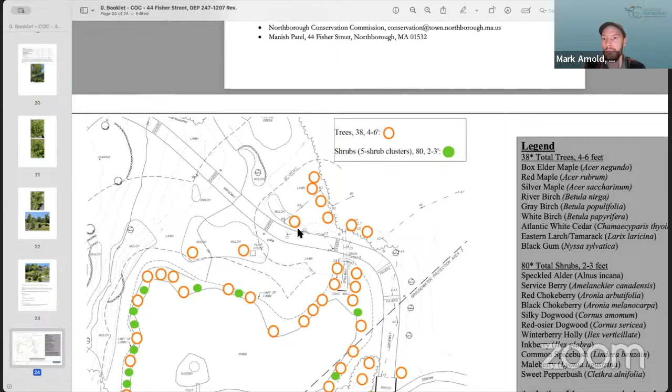So it's our fault? It's the fault of the first person who cleared that wetland. That's the fault of it. And when did that happen? We're not sure, and we have to kind of go with what's there now.

These ponds on the property were built. So if you wanted to actually restore the hydrology of this river, you'd actually fill in the pond, but we're not doing that. So I think there's some flexibility that has to happen there, because this pond with the gazebo in the middle is actually not a natural pond -- it was dug out at some point. The river was diverted to flow by the pond, but also have a little bit of water flow through the pond. So we have fresh water going through our nice pond. That's what happened.

So there's a little bit of a balance that has to be met when it comes to regulatory compliance in terms of maintaining wetlands. There's a lot of wetlands that are farmland -- you're still allowed to farm the wetland. That's because it's historical activity, and therefore it gets maintained.

And I believe Manish Patel is on, and I'm sure he's listening to this conversation. If the commission wants to ask Manish if he'd be willing to stop mowing that area, I think he'd be willing to listen to that. Although I'm not sure if he's going to be willing to do that, just because I think we both feel that it was an area that was already maintained in the kind of conditions that it is now.

So just while you were talking, I pulled up the town's website and looked at the 2001 and 1990 aerial photos, and I don't see a tennis court in that area. So I'm not sure of the tennis court reference. When did that come into effect? When was the tennis court there? The plans for the driveway show the tennis court and say that it's going to be removed.

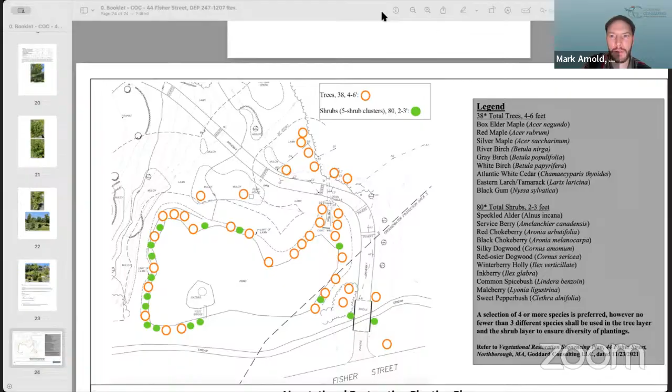If you want, give me one moment. Let me find... Okay, so it was probably between 1990 and whatever the plans were in 1998. So it was constructed for a little while there. It's not like it's been there for a long period. We don't know when it was actually put in. Right, so that's the one thing we don't know. But we do know there was a tennis court there. And also you see the tree line.

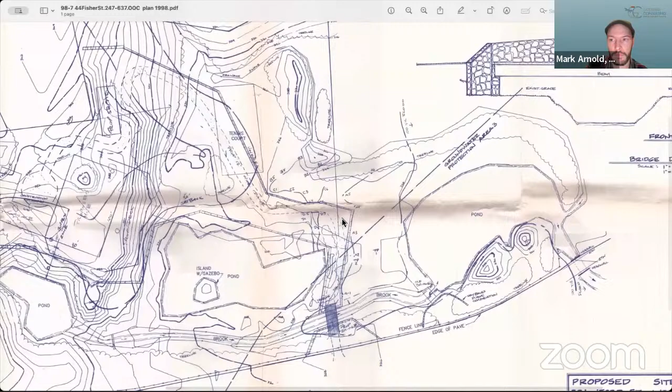Any more commissioners' questions? Comments, concerns?

If you go to Mass Mapper, you can see the 1990s black and white aerial imagery. You can see an outline of what maybe was a tennis court at one point, but it's still all grass. But yeah, to what Vinny was saying, even in 2001, there's no tennis court there. There's a driveway. And in 2005, it's not there either. So it had to be back in the early 90s, something that was put up before even a house was there, and maybe taken down.

It appears that it was probably part of the historic development of the property. When they built the ponds, they put up the tennis court, they managed the wetlands and landscaped everything. And then when DeFutis came in, they put the driveway through the tennis court, so the tennis court had to come out, otherwise the driveway couldn't be there. So the driveway goes right through the tennis court. So it was, again, a weird dichotomy of, okay, the driveway goes through the tennis court, but they don't say remove the tennis court. It's apparently going to be removed, but there's no note saying it, and the limit of work doesn't go around it.

So what was going on there? I think there was probably some inferred discussion with the commission saying, oh yeah, we'll remove the tennis court and it'll just go back to lawn. And they probably were like, that's fine. Again, this is looking back to how the commission acted and how commissions acted back in the late 90s, which was a lot different than we do today.